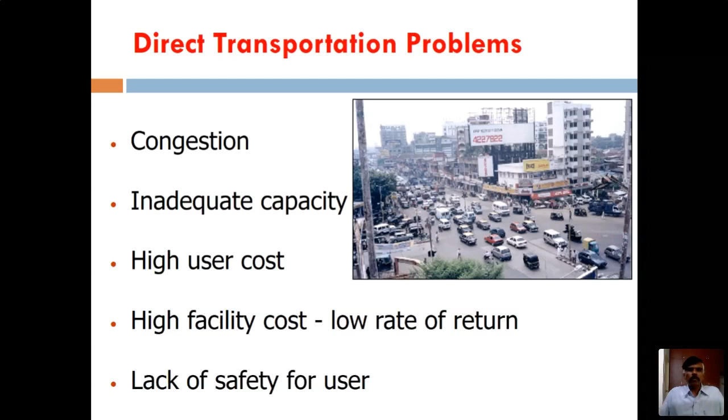Okay, these are all problems with our cities. Then the rate of return is very low, so people are not investing into our cities. Ultimately, safety - in fact, we should start with safety. Safety is the most important aspect. Anyway, safety is also one of the problems.

Next slide, are you able to see? Yes, sir. You also have indirect problems, primarily air and noise pollution. Of course, now because of corona, people are telling that the air pollution has reduced considerably. 70 to 80% of the contribution to air pollution is coming from the transport sector. So because there was no transport, no traffic, no vehicles, the air pollution got reduced, which means that is the extent to which we are degrading the environment.

Health issues, not only physical but also mental and spiritual. And global warming has always been a problem - to the extent of 75% of greenhouse gases being emitted by the transport sector, and we are reliant on imported oil, so when the oil price goes up, we are forced to increase the price. So due to all these reasons, our transport sector, especially in the cities, is really struggling.

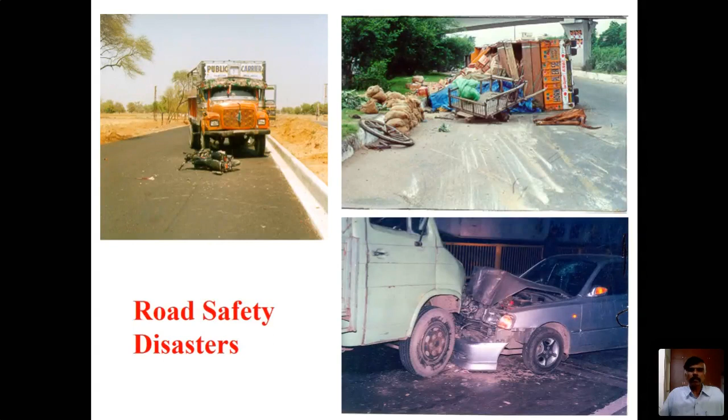Road safety is a very important aspect, even in cities. Of course, very spectacular accidents take place on highways, but cities are no exception. A lot of people are dying in our cities.

But that seemed a huge number because all the people could see on their TVs that so many lives were being lost. And when the tsunami hit us, so many people died—maybe in India not to the extent of 2.8 lakhs, which is the Pacific Rim figure including Indonesia, Thailand and other countries. But more than 5,000 people died in India.

Now you just compare this with the fatalities on the road. Road accidents are killing—now the figure is even higher—1.5 lakh people every year. Can you think about that?

So we generally say that there is a tsunami on our roads. Tsunami is not restricted to coastal regions. Tsunami is also coming along our roads and killing our people. This is a terrible phenomenon.

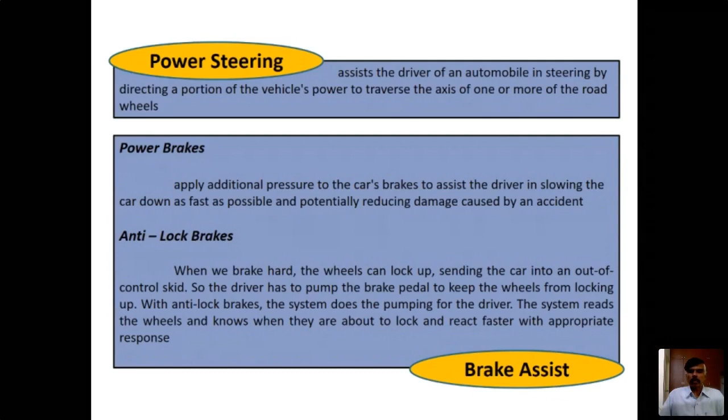And you have the pre-crash system. As I was telling you, the vehicle in front of you is braking and you are not looking at it, because maybe his brake light is not functioning, or it is misty or foggy. If you have a pre-crash system, it will detect the distance to the previous vehicle and will alert you - it may be a warning light, a flash, or a sound that is emitted, so that immediately you will wake up. Suppose you are daydreaming, you will wake up and apply the brake.

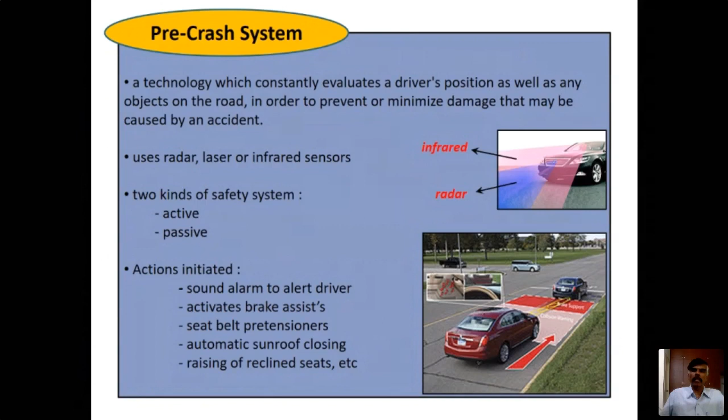Blind spot monitoring is very, very important, especially for big vehicles. You might have seen when you drive on the road that there are big trucks, and it is very, very dangerous to go close to the truck because the driver cannot see you. When you try to overtake the truck, especially from the left, many people try to overtake from the left - he really cannot see you because of blind spots, and there will be an accident.

Like what happened to Marium Pichai, the minister in the erstwhile Dr. Jayalalitha's government. He was traveling at very high speed from Trichy to Chennai to attend a swearing-in ceremony. That was about 8 years back, and from the records they found that he was traveling at 140 kilometers per hour.

Anyway, we'll come back to the speed matter later. What happened was suddenly a truck came onto his path because the driver did not notice this vehicle. He was traveling in a very, very safe vehicle, Innova, but still because he went and crashed into the truck, he died. So the blind spot monitoring is very important.

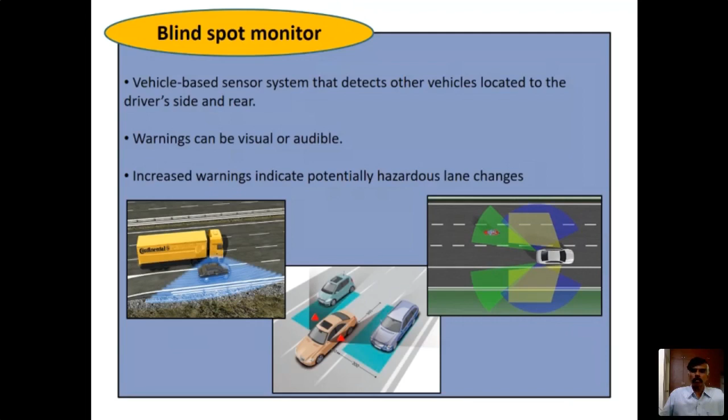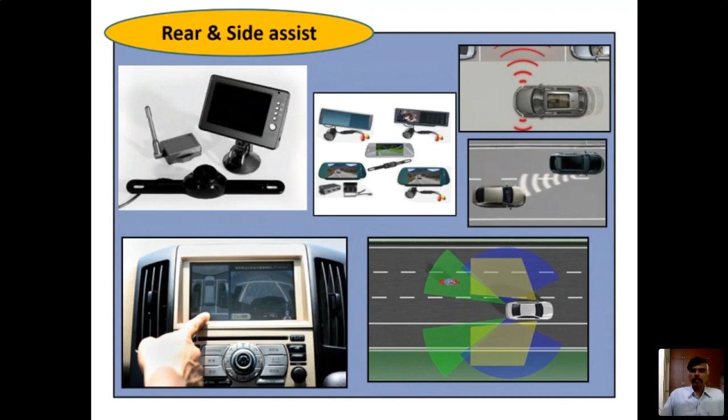In an intelligent vehicle, the system will monitor the blind spot to see whether there is any obstruction, then side assist, rear assist, especially when you are changing lane. In India, people are not bothered. In fact, there is no lane discipline, we have laneless traffic. But just like that, people change lane, so your vehicle should have some assistance to detect the vehicles which are changing lane suddenly.

So there are so many systems like microwave based or short range radar based and millimeter wave systems, etc., which are able to detect the vehicles which are coming very close to you, to the side as well as to the back. You are not able to see to the side or to the back.

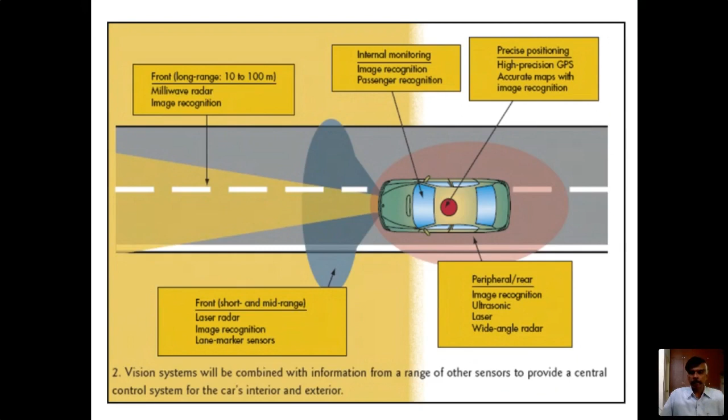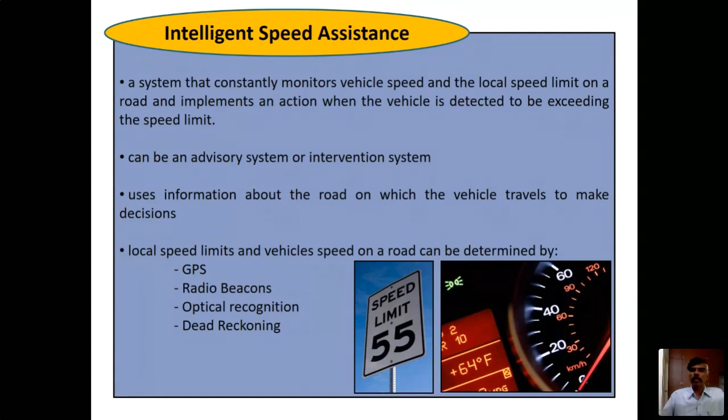I find that the infrastructure is excellent and people are very, very conscious of the speed limit. So if they see a speed limit sign, they will adhere to that. That is not at all the case in India. You can see for yourself that whatever be the speed limit, whether it is 60 or 80 or 100, people travel at whatever speed they want, 120, 130, and so on. So the speed limit is very important. And when you are enforcing a speed limit, automatic systems will warn you. When your speed goes beyond the speed limit, it will tell you that you are exceeding the speed limit, you have to reduce the speed.

Are you able to see this slide? I am not getting any feedback. Yes sir, yes sir, yes sir. See, the problem with the webinar is that I am not able to maintain eye contact. I don't know whether people have slept off or they have turned off, isn't it? Or they are taking a break. Anyway, I assume that most of the people are still on. I hope I am not boring everybody.

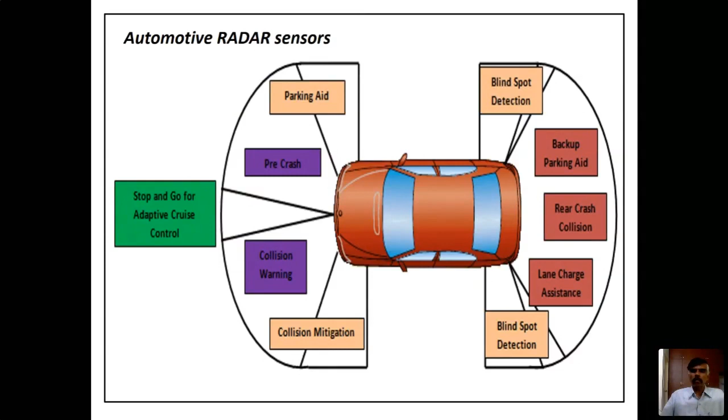As I was mentioning, there are so many sensors which can see around the vehicle. You can leisurely take a look at this slide later on.

Navigation. Of course, now everybody follows GPS, everybody is mobile, you have smartphones, your smartphones are having GPS, Google Maps, and so on. And your vehicles are having screens, navigation screens. Of course, Google Maps are very famous, they can take you anywhere. Only problem is on the way you might get stuck into some narrow footpath. Once when I was trying to reach a resort in Karaikal, it took me to the water edge. Luckily, I escaped. But still, navigation systems are very, very useful, so they are also part of intelligent transportation systems.

It will try to sense your BAC, blood alcohol concentration, similar to what the police do. Traffic police catch you at 1 o'clock in the morning and want to test whether you are drunk. Earlier they used to make you blow into their face to detect it. Now they measure the blood alcohol concentration by making you blow into a meter. Here, the vehicle itself will make you blow. If your alcohol level is beyond the safe limit, you cannot turn on your vehicle, so you have to catch a cab and go. This is a safety aspect.

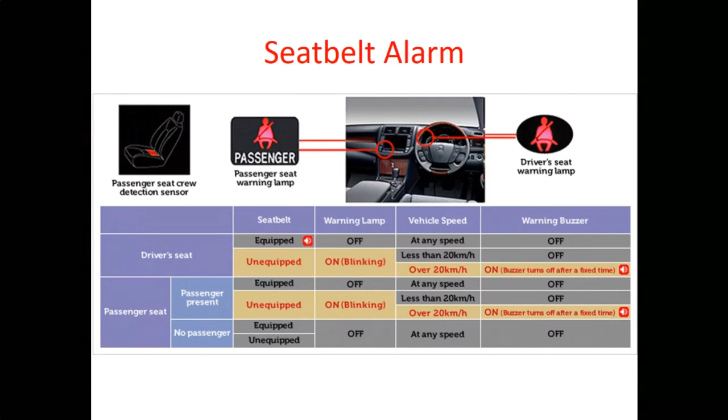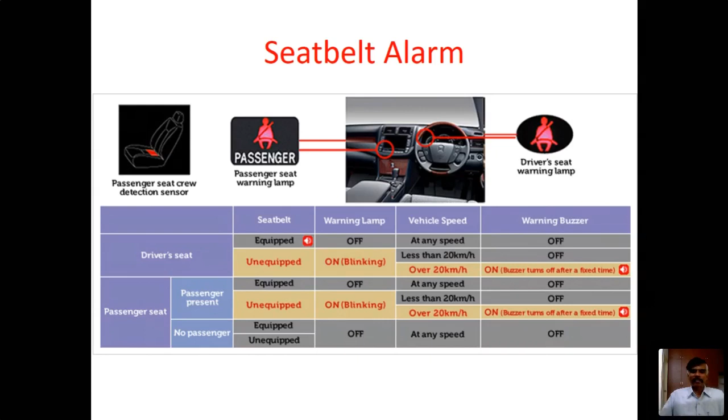Now these modern vehicles will not allow you to drive properly. The vehicle will keep blinking a light or beeping until you push the seat belt into the receptacle. But there are other vehicles which will not allow you to move the vehicle itself unless you are wearing the seat belt. This is a very important point. Of course, there are people who circumvent this problem. You can always put a matchstick into that receptacle to fool the system, but you are only fooling yourself.

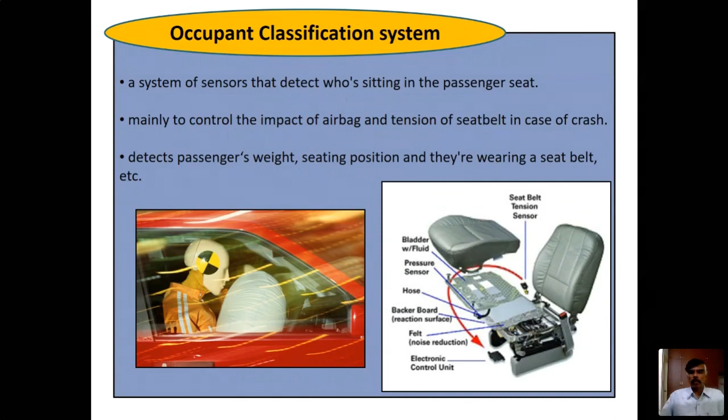Occupant classification system is another important thing. The intelligent vehicle can sense your weight, because there are people who are 100 kg heavy and people who are 50 kg light. In both cases, the airbag should not exert the same pressure. You might be aware that children are not allowed to sit in the front seat, because an airbag, when it expands, can kill the child since it expands with some force. So here it will measure your weight and automatically adjust the pressure of the airbag so that it is not harming you.

Now this ATMS is a vast topic. All your signal systems, signal controls, loop detectors, vehicle detectors, all kinds of technologies are there. Maybe we'll briefly look at that if time is there. This comes under advanced transportation management systems.

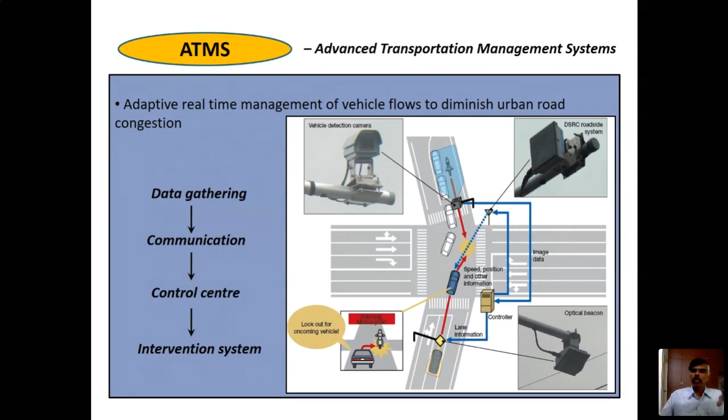There are thousands of signals. Our cities don't have that many signals; maybe metropolitan cities have a few hundred, but any city in the world will have thousands of signals, and all the signals are linked. They are all coordinated, interlinked, and controlled from a control center. The signal control system allows you to go in a more efficient manner. I'll come back to this later on.

Look at what happens at this intersection. This green vehicle is approaching the intersection and is not able to see the red vehicle because it's coming beyond the yellow truck. If this driver hasn't seen that red car, he would have gone ahead and collided with it. Now, if AVCSS, the advanced vehicle control and safety system, is there, it will detect that red car and make him stop. Because of this, the accident is avoided.

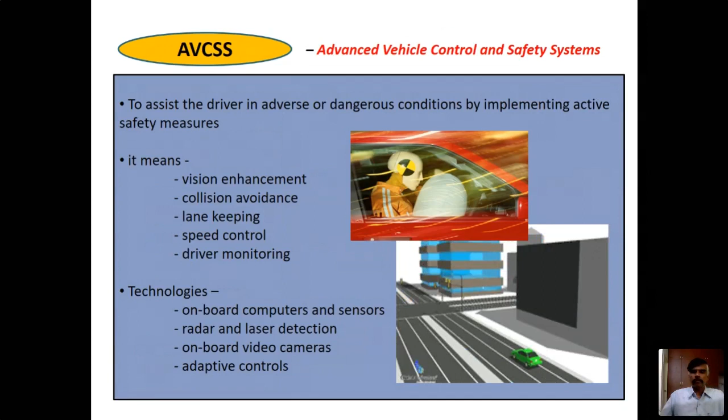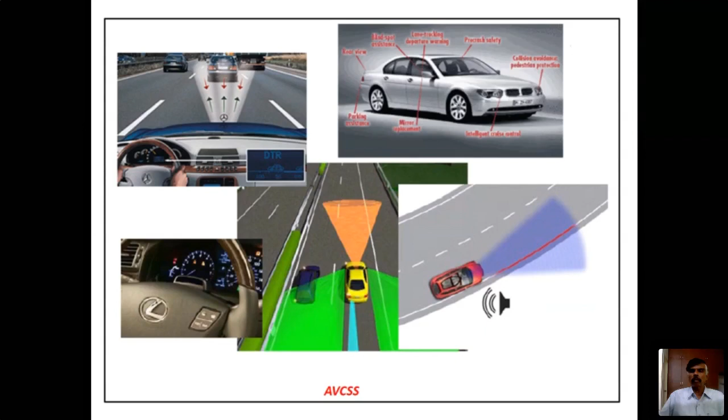You also have AVCSS systems to detect the edge of the road, as shown in the rightmost figure. This happens especially when you're driving at night and you are drowsy. The road is taking a turn, but you are not turning, you are going straight. Then you will crash into a tree. Now this AVCSS monitors the edge delineation line and knows the line is turning, so it will automatically warn you or even turn the vehicle to save you.

Now this obstacle detection or pedestrian detection is another important thing. Just watch this.

This is a common problem. For example, you might have read in the news about vans carrying children. The children get down from the van and then cross in front of the vehicle, and the driver is not able to see the child. Or sometimes the child is crossing behind while this fellow is reversing.

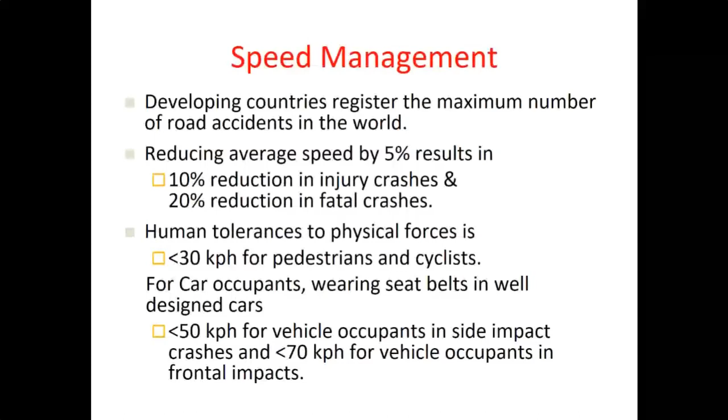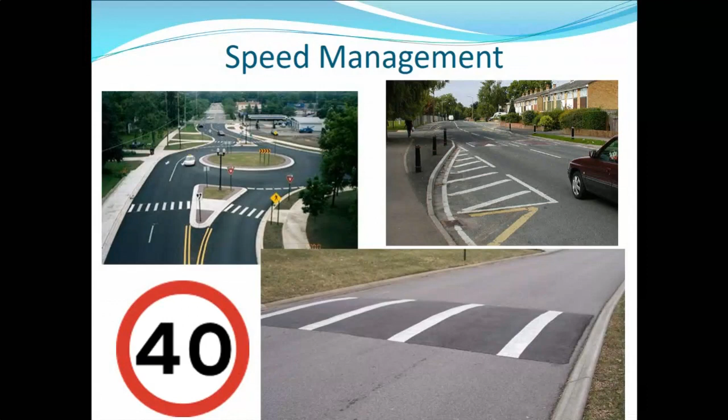So it is not 100 or 110 kilometers per hour which kills. Any speed which is not safe is able to kill you. So you must maintain the speed, but how to manage it? That is the challenge. There are a lot of techniques for this, and any urban management or transport management needs this kind of speed management inside the city.

But there are also modern techniques. So I'll show you a video. You can watch this video first. Can you see this video? Just observe, it will play again.

See, this car is approaching. There is a screen to the left, and that screen is picking up your speed and indicating it. You see that? So when the vehicle is approaching, it is able to automatically measure the speed.

Actually, that was a video I shot on the approach to Washington DC, the capital of the US. There the speed limits are very, very low, as low as 40 kilometers per hour, or 30 miles per hour, or even sometimes 20 miles per hour. So if there will be a flash, you know that you have been filmed.

So it will immediately catch your number plate and then charge you if you are above the speed limit. This is an urban speed management project. We had a collaborative project with IIT Madras under the Center of Excellence, where we devised a system of measuring the speed and displaying it.

See, there is no point in recording your speed and just penalizing you. There are systems now which can measure your speed, catch your number plate, and send you directly a challan, like red light jumping systems, the red light violation cameras. Similar to that, but what we want is to use a variable display and show the speed. It should say, okay, you are traveling at 50 or 60 kilometers per hour, whereas the speed limit is 40.

And if possible, display the vehicle number, and if we can scan into the database and display the name, saying 'Moses, you are traveling at 50 kilometers per hour', immediately I'll wake up. I'll be aware that somebody is watching me and maybe I'm going to be caught, so automatically I reduce the speed. This is the kind of technology being tried out.

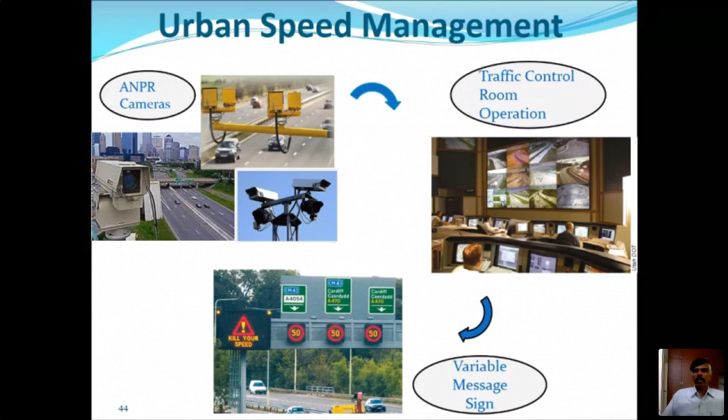So they have these ANPR systems where the number plate can be captured and immediately recognized. Of course, we have our own problems, especially with Indian number plates. There are people who write 'Tamil Nadu' instead of 'TN', and others who write in Devanagari script, in Hindi or Tamil numerals. So there are a lot of problems, also non-standard number plates. But if the number plate is standardized, we should be able to decipher the number and catch the fellow who is exceeding the speed limit.

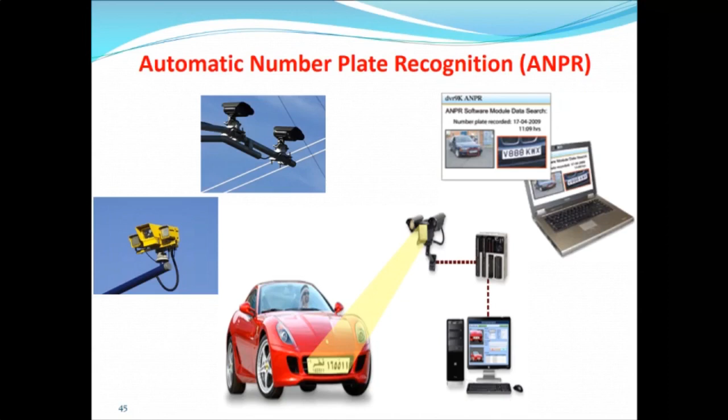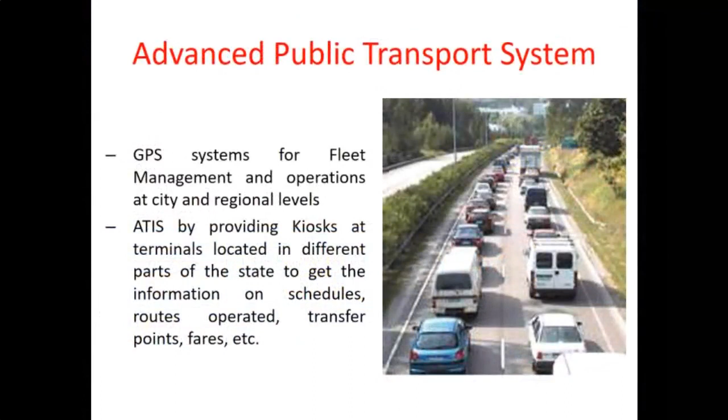And in the meantime, we should also describe that problem to him, so variable message signs are used, the so-called VMS. We'll look at VMS again in another context. You also have these ITS solutions in APTS, Advanced Public Transport Systems, where you can give dynamic information on schedules and so on.

For example, you can have displays inside the bus. This is very common in the US. In India also, I think some buses show you what the next stop is, so you know that the next stop is coming. This is very famous. For example, earlier when I used to travel from Chennai to Warangal by GT or some train, Warangal would come at 3 o'clock in the morning.

So how do you know that Warangal is approaching? You have to keep awake. It is very painful to sit awake and not miss your station. Similarly, people traveling from Chennai to Trichy who want to get down at Srirangam don't know when Srirangam is coming. The Vaigai Express or Pallavan Express will stop there for only 1 minute. So what these fellows do is they get out of their seats at Ariyalur and stand by the doorway for 1 hour. Instead, if it shows 5 minutes before the station, okay Srirangam next 5 minutes, you can peacefully get up and go. These are all very simple technologies, but vehicle tracking, train tracking, all these technologies are there in ITS.

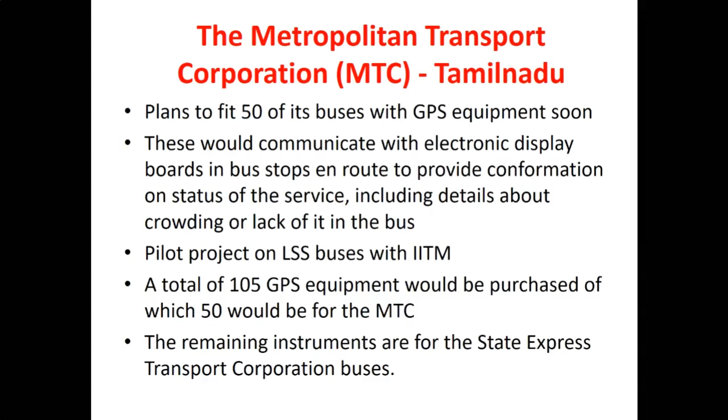Parking has become a nightmare in our cities. Whatever city you come from, people are just indiscriminately parking on the road. And mind you, the road infrastructure is totally different, designed maybe with DBM, BC and all that, for moving heavy vehicles at 10 MSA or 20 MSA. So you are simply using that space for parking a stationary vehicle, and it also reduces the road capacity.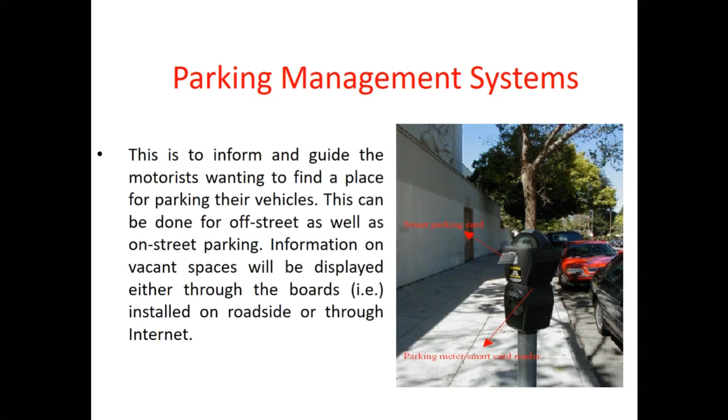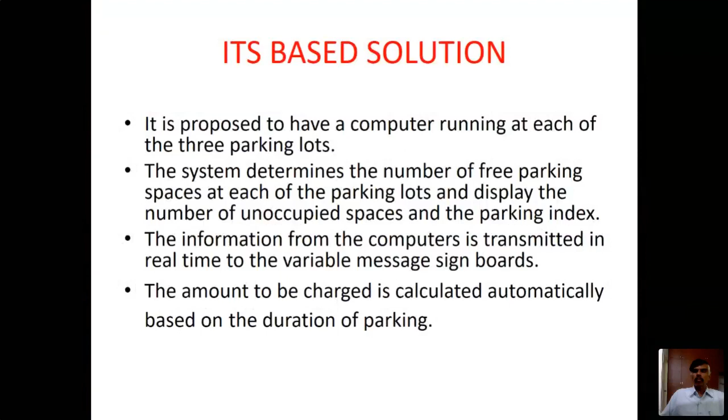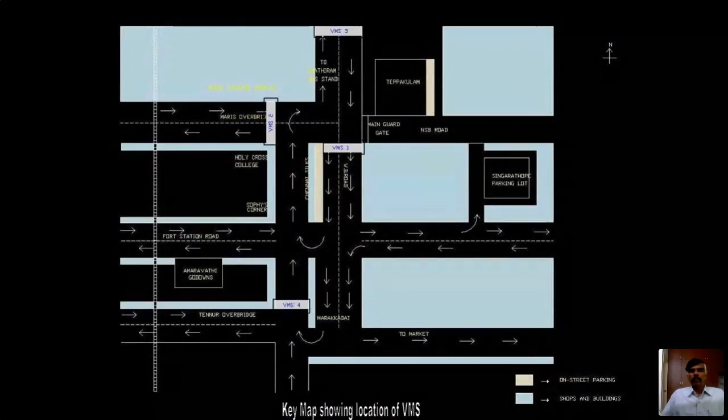So you need to have some parking management system. We did a study at Trichy to solve a parking management problem near the Main Guard Gate, which is the city center. There are some parking lots around the Main Guard Gate area, but the problem is you don't know whether parking is available or not. For example, on this screen, to the right, you have the Singarathope parking lot, where something like 30-40 vehicles can be parked, but the problem is it will always be full.

So when you are approaching the Main Guard Gate area, you'll be going along these arrows, and after you've gone all the way inside, you find there is no space. So you have to come back and go to some other option like the Amaravathi parking lot. Instead, you can notice these VMS signboards in 4 locations, which display the availability of parking at each of these parking lots. So when approaching the city center, if you know there is parking space, you will go in; otherwise, you will go to an alternate parking solution. Thereby, you can save your problem as well as reduce congestion on the city streets.

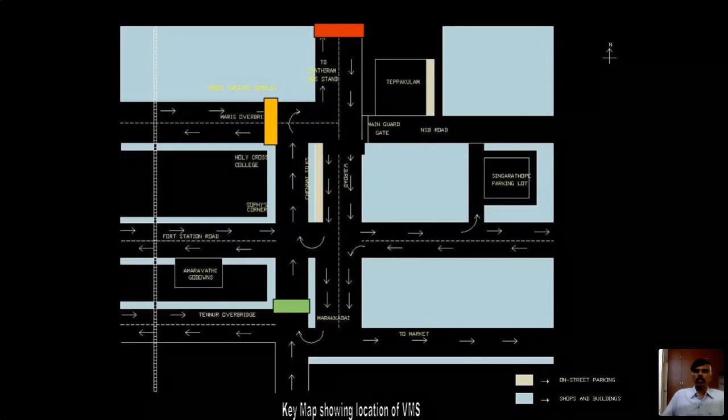It's called a pileup or multi-vehicle accident. So how do you avoid this? When an incident occurs, when two vehicles are involved in a very minor accident, you must immediately be notified of that accident so that you can remove the vehicles and avoid this kind of multiple accident. So you need to have an incident management system. Actually, this was a student project done here at NIT.

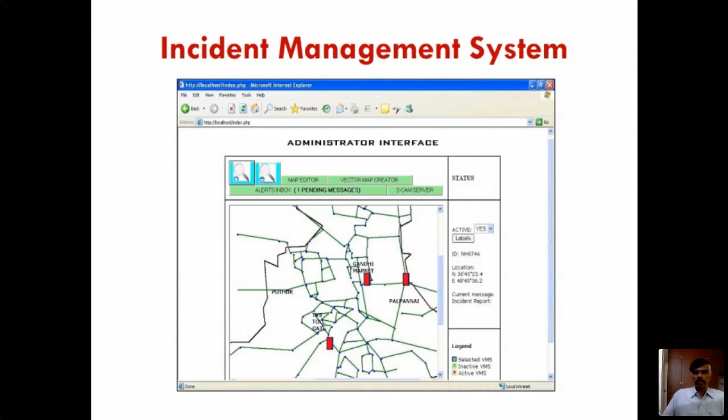What is shown on the screen is a map of Trichy, and the red dots indicate the access points. There are various highways, for example NH81, NH45, NH67, and all entering NH210 from Karaikudi. They are all entering the city. So when they enter the outskirts, there can be an incident management board which informs about some accident that occurs. These are the entry points from Chennai, from Tanjore, from Madurai, from Ramnad, and so on.

So look at this screen. Suppose you're coming from Chennai and want to go to the Tiruchirappalli junction. Normally you'll take the bypass road and reach the junction in a very short time, maybe 10 to 15 minutes. But there's also an alternate path inside the city, through the main guard gate area, the market area, Palakarai and all that. It's very congested and will take at least half an hour. So everybody prefers the outer road.

Now the problem is, suppose an accident happens on the outer bypass road and you're not aware of it, you'll come and get caught in the jam, maybe for 1 or 2 hours. But if an accident occurs and you're informed about it right at the top, before you enter the city, you'll take the interior road and be delayed by congestion, but only by 10 to 15 minutes, not 2 to 3 hours. So this is a simple incident management system which can be used.

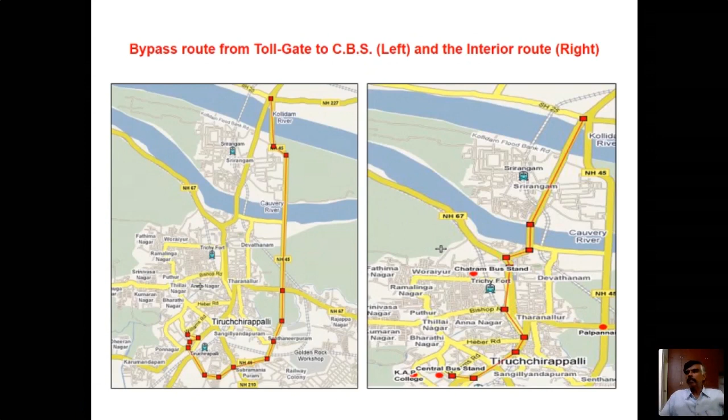Again, variable message signs are used for this, where they give you information. You would have seen these variable message signs on our expressways, but they only give static messages like 'wear your seat belt' or 'heavy vehicles always drive on the left' - but they never do that, or 'heavy vehicles don't use the first lane' - but they always drive on the first lane. That's different. These variable message signs should give dynamic messages; only then will they be useful.

Okay, traffic signal control - I was talking about traffic signals. When you have a lot of signals, like thousands of signals in a city, they can be coordinated, controlled and managed from a common location. Take one arterial road, say Anna Salai. Suppose you're traveling from Tambaram to Secretariat, there are something like 30 signals along Anna Salai. Suppose it's your bad day, you got up on the wrong side of the bed, and at every signal when you come, the signal is red. So at every signal you're delayed for 1 to 1.5 minutes. So what's the total delay? It runs to 40 to 45 minutes.

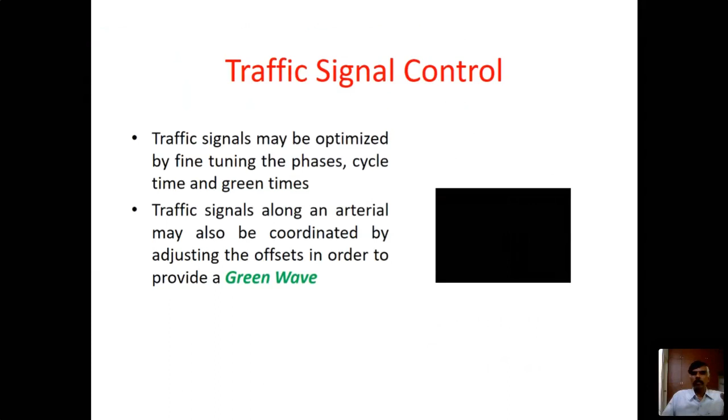So this simple strategy of maintaining the signal cycle time - people who learn traffic engineering will know about this. You can do offset optimization or even within-cycle optimization; there are a lot of software packages available which can coordinate the signals. You also have adaptive signal controlling, whereby you can measure the traffic volume and then coordinate. It's not just one route, but the entire network, entire cross streets can also be coordinated. Most advanced countries follow this kind of system, including Singapore.

I think that is self-evident, whatever I said.

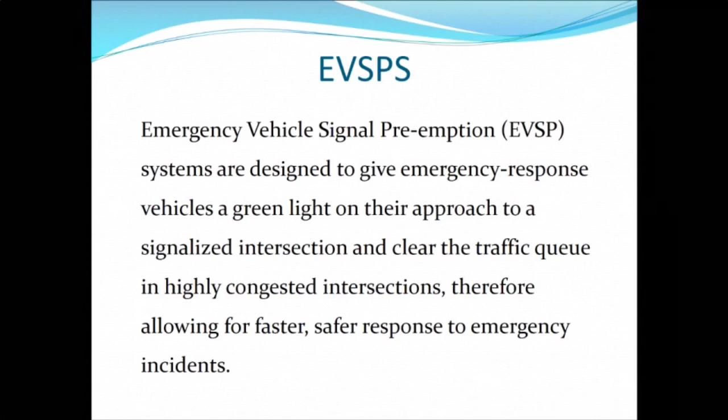Another smart addition to the signal system is EVSP, emergency vehicle signal preemption. Many times an ambulance arrives at a signal and gets caught in traffic, flashing but unable to clear the signal system. So what we can do is detect the emergency vehicle and give it preference. A warning signal will be transmitted, received by a signal controller, which will preempt the signal phase.

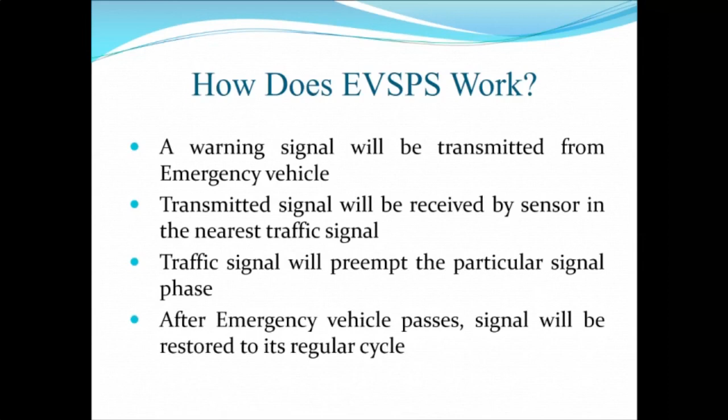This doesn't mean it will stop other traffic and only allow the ambulance to go. The signal normally works in a cyclic fashion, so when green is shown to all other phases, it eventually comes to your phase. When an ambulance comes to that signal, green is immediately given to that phase, so all vehicles in that lane get cleared along with the ambulance. Then the signal goes back to normal operation. This kind of strategy can be adopted.

Now, about red light violation. These are all cameras available at intersections. If you jump a red light, your number plate will be caught by the ANPR, and an automatic challan or fine will be issued by the system.

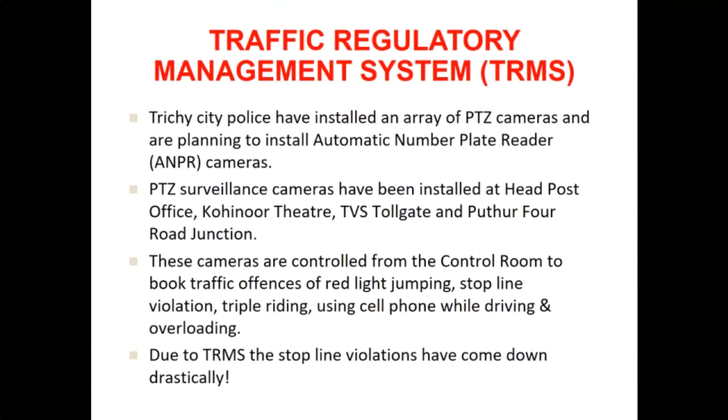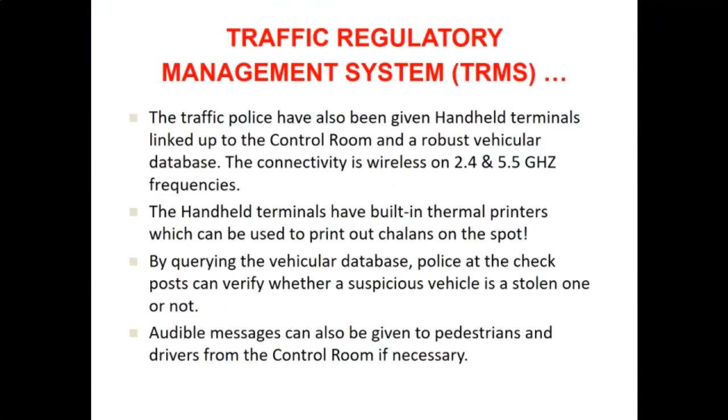Chennai has its own management system, and we also have TRMS in Trichy, where they have installed PTZ cameras at key locations like junctions. They also have a database where all vehicular data is available, so just by scanning the vehicle's number plate you can get the entire information. They also have handheld terminals given to traffic police, integrated with the system, and 30 patrol vehicles fitted with GPS so they can be directed to the incident spot immediately.

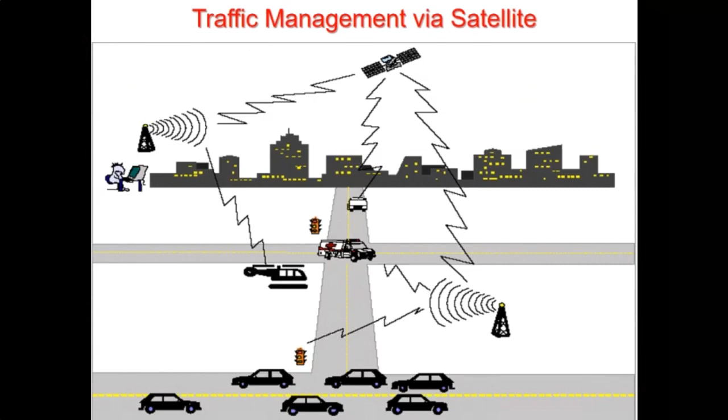Ultimately, they may have traffic management via satellite link, and instead of having patrol vehicles, they may have helicopters. That is the stage our city traffic may have to go for.

Coming to the sustainable part, we should also look at the green outcome. Vehicles, as I mentioned, are notoriously polluting and give rise to a lot of issues in air pollution and environmental degradation. But sustainable transportation means transportation has to be eco-friendly, so now people are talking about green transportation.

What exactly is green transportation? You need effective use of resources and demand management, like I was talking about with ERP. By controlling the number of vehicles entering the city, you can reduce pollutant levels inside the city. Why should people make unnecessary travel?

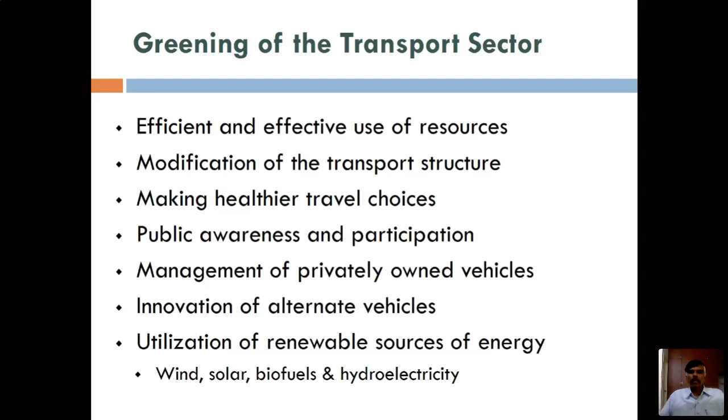There are different vehicle technologies, alternative technologies, to have green vehicles, and it's not only fossil fuel consuming vehicles like private transport, but you should also have alternate modes of transport which are energy efficient, economical, and environmentally friendly.

Pedestrians, actually, if you take a city, the smart city is one which should give prime importance to pedestrians. They say a pedestrian is the king of the city, but in our cities pedestrians are not able to walk. People talk about walkability, but are all our cities walk friendly?

We cannot, because the sidewalks are always crowded, encroached upon, and you also have political parties putting up banners, preventing people from walking on the sidewalk. So if you are not walking on the sidewalk, you have to walk on the road. Then what happens? You are likely to get killed, or it reduces the capacity of the road.

Walking is also good by way of exercise, and it is energy efficient. So walkability is key, and people have become conscious of this fact and are redesigning their cities.

Actually, we keep designing our cities for powered vehicles, two-wheelers. Why should we do that? We should in fact reorient our cities towards walking and then cycling modes.

Pedestrians along with cyclists are the VRUs, the most vulnerable road users. So we need to have segregation. How do we segregate the traffic?

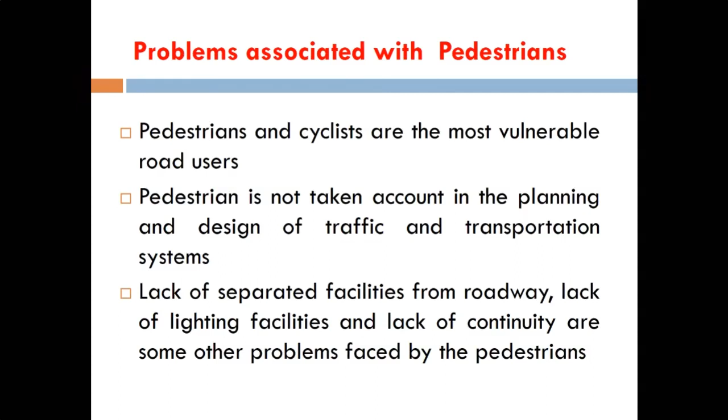We need special facilities like zebra crossing, pelican crossing, over bridges, etc. For example, raised crosswalks, which you see in Bangalore. Instead of a normal zebra crossing, you have a raised zebra crossing, so vehicles automatically reduce speed when they approach.

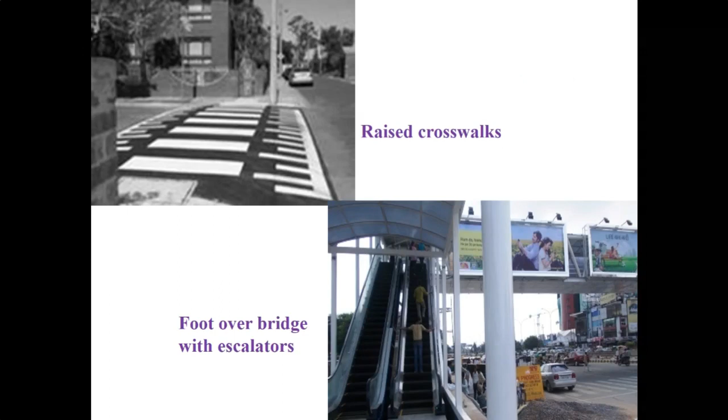You also have foot over bridges, like in Mumbai, with escalators, so elderly people who find it difficult to climb stairs can make use of the walkways.

You also have walkways which are not only crossing the streets but also going along the streets, exclusively for walking. You see this in Mumbai, Bangalore, and other places, and also pelican and toucan crossings.

Pelican and toucan are birds, as you are aware. Since we talk about zebra, which is an animal, people have started talking about pelicans and toucans. Pelican is a light-actuated crossing.

You go and register your request to cross by pressing the button, and it will give you a green phase. Not immediately—next time the phase comes to you, it will give green. Otherwise, if there is no request pending, it will not give green to pedestrians, and vehicles will continue to go. These kinds of crossings are very efficient.

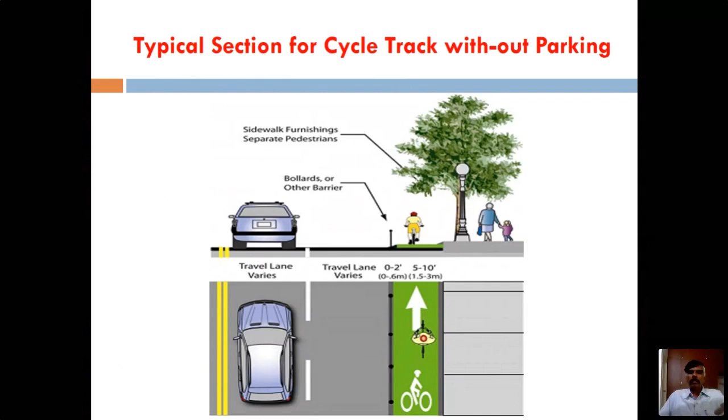You see a barrier dividing the vehicles from the cycles, and another barrier beyond which you have the cycle track, and then the footpath where you can walk. This is a well-designed city street, obviously from a developed country.

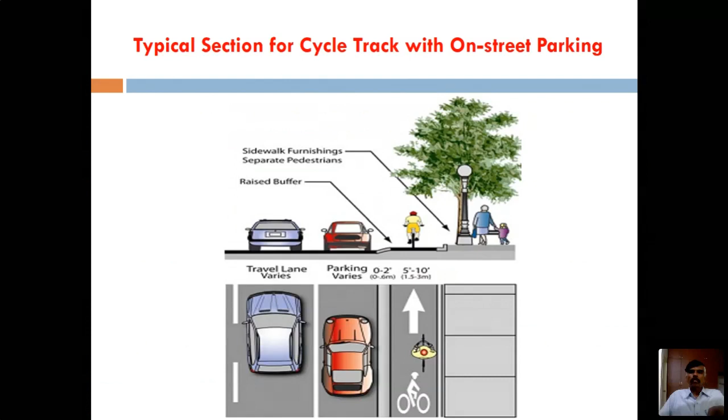Even if you have parking, you can have a cycle track, and now the parked vehicles provide protection, so you don't need any barrier. But the point is, you need to have separation, so assured safety is there.

Then you have a raised curb, then cycle track, again footpath, and so on. In fact, they even have dedicated cycle tracks—you can go from your house to your office without having to cross any vehicular traffic, assuring safety as well as efficiency, and it gives you exercise as well.

Bike station. This is a revolutionary concept. You might have read recently in the papers or seen on TV that these kinds of bike stations are going to come to Chennai. They are already there elsewhere, so it is very common to use. I have seen tourists simply take a bike and go wherever they want. They look at the monuments, and then they leave the bicycle in some other place, another station. When they reach that destination, for whatever period they use, like 1 hour or 2 hours, they will be charged $5 or $10. They pay, okay. So it is very, very effectively used, and this concept is coming to India also.

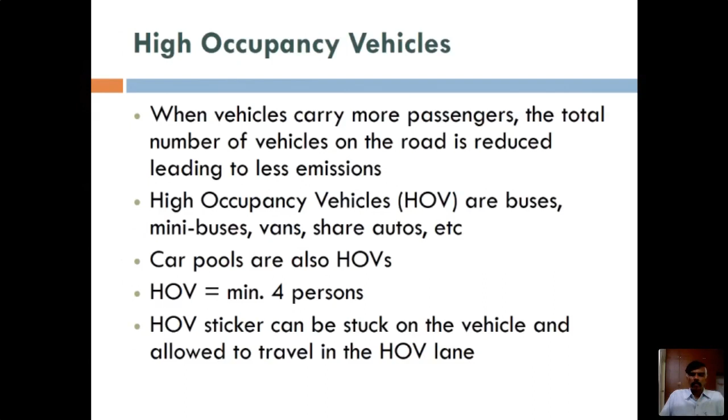Now they have these HOV lanes where a minimum of 4 people will travel. So if there are 4 people in your car, you are allowed to go on the HOV lane. You see that all the other lanes, I've seen in the US that 4 or 5 lanes of traffic will be there, all very heavily packed, but the HOV lane will be free. Because in the US, people travel alone, so there will be mostly single owner driven cars. Actually in the US, they have this 2+ system. They don't even insist on 4 people; even if 2 people are in the car, it becomes a high occupancy vehicle. So you can travel in that HOV lane and save a lot of time.

You have the concept of fringe terminals, where you can park your car in the fringes of the city, then take a bus to the city center. Buses are free to go. You can have exclusive bus lanes, or these bus lanes can even be contra-flow.

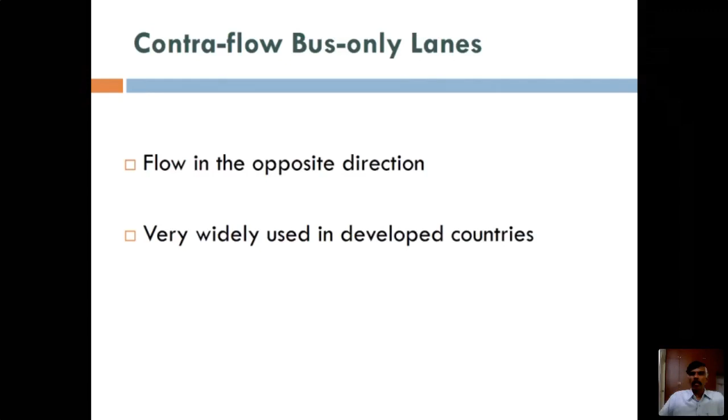Signal preemption. Like we have emergency vehicle signal preemption, when a bus arrives at the signal, it will emit a radiation that will be detected by the signal controller, and that will give green to it. Not immediately, but instead of waiting for the signal to turn green, it will quickly get a green. But the only problem in our cities is that there are buses on all the legs. So how do you give priority to the buses on which leg? Maybe you should give priority to the leg which has more buses, something like that. One of my students was also doing a project on signal preemption of buses.

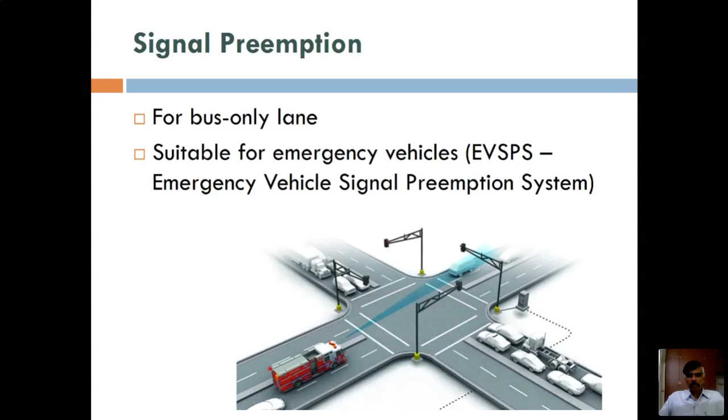Finally, we come to electric vehicles. Many of you are aware that the future belongs to the EVs, and a lot of people are talking about it. The EVs use renewable technology. Instead of wasting fuel by guzzling fossil fuels, and people say that in another 30-40 years we will run out of fuel, then what will happen? If you produce power using hydroelectric, geothermal, solar power, and so on, that power can be used to charge electric vehicles and make them move.

So what is predicted is that in 8 years, all the petrol-diesel vehicles will vanish. That is because maintenance is zero. Just think about this: Tesla is a very famous company marketing electric vehicles. A Tesla model has only 18 moving parts, but your car has 2000 parts - that's the IC engine only. Other components are also there, so maintenance is very, very heavy. We have to keep maintaining it every 5,000 or 10,000 kilometers. But Tesla gives you an infinite mile warranty.

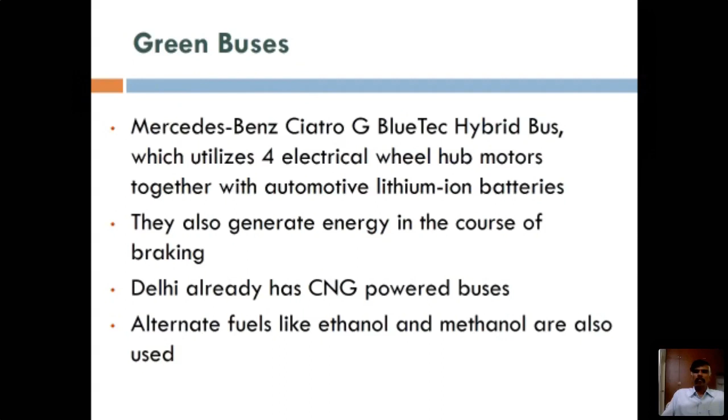Similarly, you can also think of green trains and green buses - these are also part of the green initiative. You have sustainable technologies; Delhi already has CNG powered buses, which have very low emissions. So ultimately, what we are aiming for is energy efficient transportation, which also saves the environment, making it sustainable and leaving a clean and bright future to our children.

So ultimately, what is the future? What we have been seeing so far is that the driver is the chief cause of accidents. So if you can eliminate the driver, then accidents can also be reduced, isn't it? It's a revolutionary concept - next time your car will drive you to the office and you can read the newspaper or a book while driving.

Of course this is futuristic, but you already have the Google self-driving car - you might have seen it in the news. So people are testing all kinds of alternatives. As of now, for parking systems, they are going to use these self-driving cars. I'll show you a video from Volkswagen.

Are you able to see this? Can you see the video? Mr. Parthiban? Yes, sir. Yes, sir.

So this guy gets down from his car, like in the old MGR movies - MGR gets down from the horse and says, okay, go and park yourself. So you see the wheel which is rotating - this car will do a reverse parallel parking, which is the most difficult maneuver. Those of you who drive will know that reverse parallel parking is very, very difficult. So it uses sensors to find the optimum path and squeezes into the narrow gap. You see it comes almost to the point of collision and then goes back and parks itself perfectly.